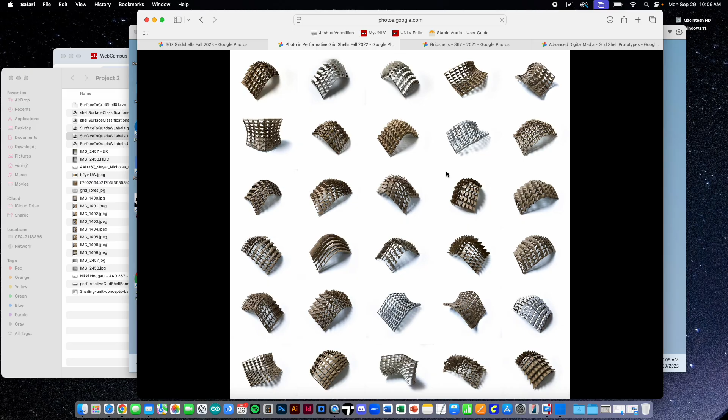I see them sometimes populating in studios, or somebody beams into class on Zoom or something, and I usually see them in the background, pinned up on a bedroom wall or home office wall or something. But again, right, you can see that there's a strange array of these things.

And I just point out that sometimes, for whatever reason, some students will pick to change the material entirely, or just the color of the material between the shape components of the grid system.

So if some of you are thinking, and I'm going to say this more than once over the next couple of weeks, but if some of you are thinking, I have a really complex component that has a lot of folds in it, right, the thicker the material is, the harder it is to make all those folds.

You can go as thin as cardstock. In fact, I've used tissue paper, because the hardest part was just taping it down so it wouldn't move in the bed. You can go with something thin, like...

...let's say cardstock, it's really thin. If you need to go thinner for your shading components in order to make a set of scoring with the laser cutter, you don't cut all the way through. You just cut part of the way through to make a score, just to show you where all those folds are.

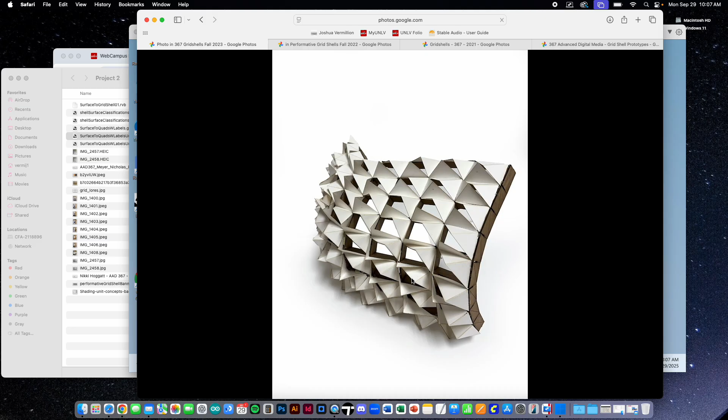So you have some options at your disposal here to play around with. So for example, I think this one had a lot of folds in it, and so I think he went thinner with the shading components.

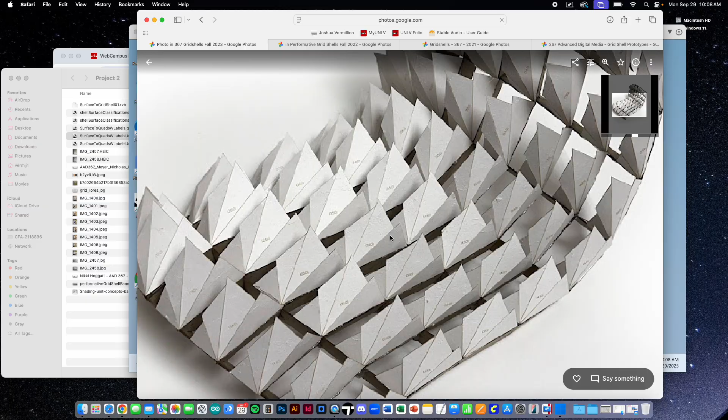Just zooming into this, this isn't my favorite one or anything, but I think you can see several things that are helpful. One is that all of those edges that touch, right, those don't all have to be separate triangles that you have to glue together. But if you can cut the overall shape and then use a laser cutter to just score those fold lines, the break lines, then it gives you a natural way to make it easier to fold it. It also shows you exactly where you're folding it, right?

And then you also see here that each one of these has a very specific place, and he's labeled them as such so that he knows that 24 goes here, 33 goes here, 43 goes there.

We'll talk about that today, and I'll show you how you can generate those labels. Because what you don't want at the end is a really complex jigsaw puzzle. You want everything to be labeled so that you know exactly which component goes into which cell, which notch attaches to the other notch, etc.

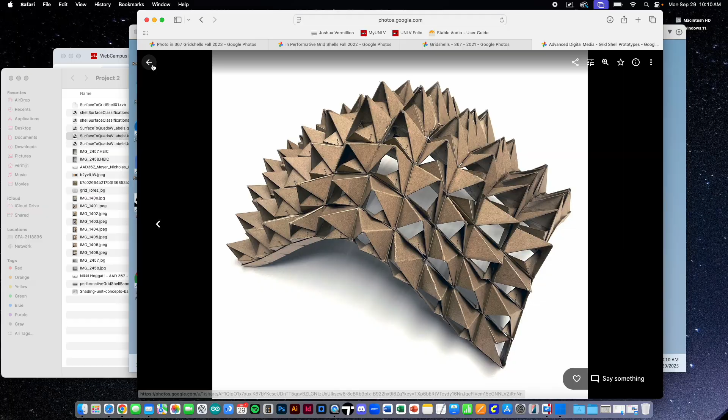I photographed these, and you can see that some of them range from really interesting to really boring, and I won't tell you which ones I think are which. Let me see if I can find anything else here that might be helpful to point out in advance. All right, let's see... no, maybe not.

So the next thing I'm going to do is point you to today's Canvas post and the modules. I've labeled this literally 'putting everything together'—everything you've done so far, getting it ready for laser cutting. You can see there are several steps performed. I've tried to break it down into discrete steps with a logical order so you can hopefully internalize it better, understand it, and then put it to use.

Essentially, what we're going to do is define the actual grid shell geometry that you will then populate with the shading components you've been working on. Not only will we populate that with your shading components, but we'll also populate it with a two-way rib structural system that already has the notches built into it. Then we'll lay all of these things out on the XY plane in top view, flat.

So we're taking three-dimensional components that are modeled in place and laying them all out, labeling them all in an orderly way so that you can then start to situate them within 18 by 32 rectangles corresponding to the size of the laser cutter bed and the size of materials you're going to use.

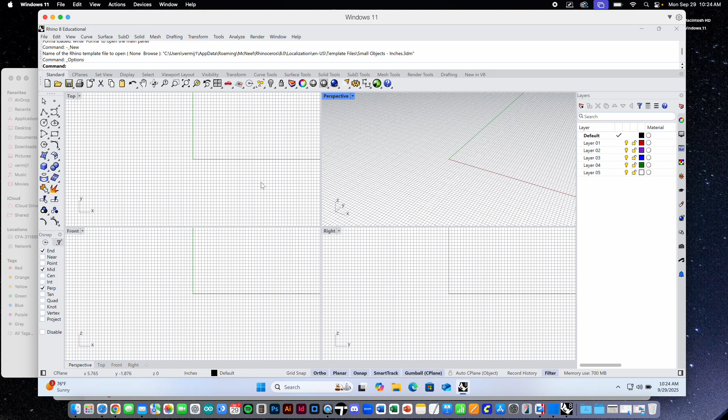We've set the units. I'm going to go ahead and open up that Grasshopper file that I gave you. It's called Shell Surface Classifications Revised 2025.

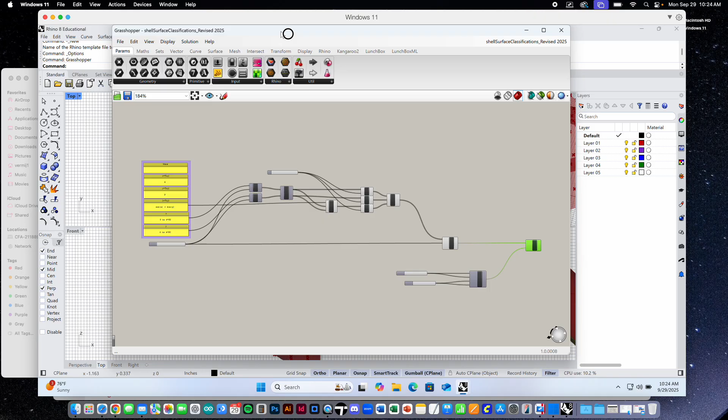I showed this to you the other day, gave you a sneak peek on Wednesday. It's essentially a sine wave swept along with a sine wave. All I'm doing is creating functions, like cosine of x times sine of y for z, plugging in a set of x values that step up, and a set of y values that step up, generating the z values, then plugging them all into x, y, z's for a grid of points, and then surfacing that.

Nothing you really have to worry about. Suffice to say, though, if you remember any of this from Algebra 2, trigonometry, and calculus, maybe even a little physics, you could be your own Antoni Gaudí. Instead of using hanging chain models, you can make digital hanging chain models. A parabola is just y equals x squared, right? Quite easy to do, actually.

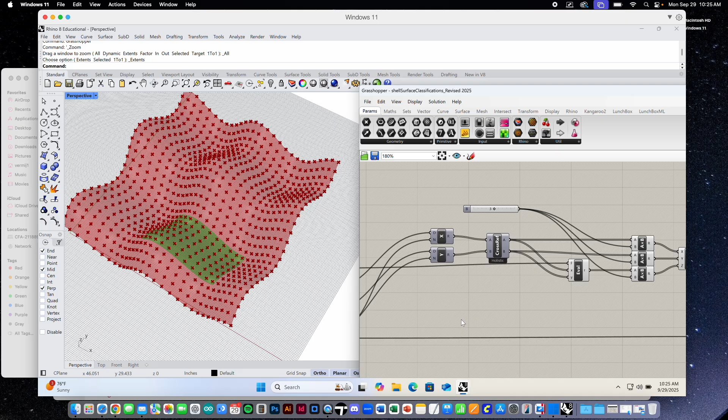Now, what you'll see here is that down here I can change these sliders, and I've highlighted this subsurface. So I have this larger surface, and you can use these sliders to identify which patch, which subsurface, which plot of land you want. As I move this, you can see the size stays the same, this thing isn't going to get a lot bigger or smaller. Everybody's going to have approximately the same scale.

And at that scale, when you break this down into pieces, all the ribs and everything else will still fit on your 18 by 32 max size laser cutting envelope. So that's why I've done this.

Second, if I get really close to the edge, let me select this again, you can see it's just going to slide right off, and you'll get something that's not good. So make sure you maintain that margin so you're getting the full surface patch that you need.

Third, I'm going to try to position this so that I don't have symmetry. When I look at the isoparms in this direction, I have a high point that goes to a low point, and there's an inflection here. It's the same thing in this direction. So now I know exactly what end is which way, because there's a high and a low, and a high and a low. So this isn't bilateral symmetry.

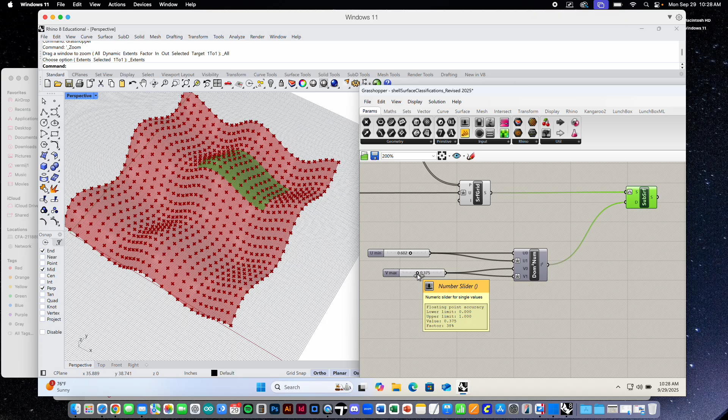Make it easy for myself. Once I have that, I'm almost done with this Grasshopper file. I just need to take this little subsurface that I want to use for my grid shell and bake it into Rhino.

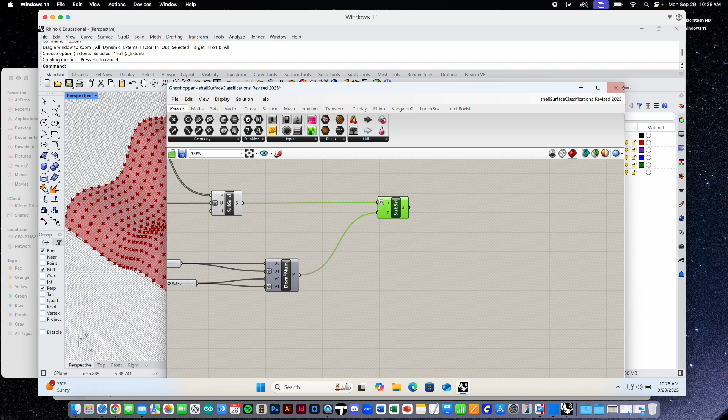I'll just bake it into layer 1, hit OK. I can close this Grasshopper file forever because this is the shape of my grid shell. Everything that I do—shading components, structure, everything—is going to be populated on this. Nothing else.

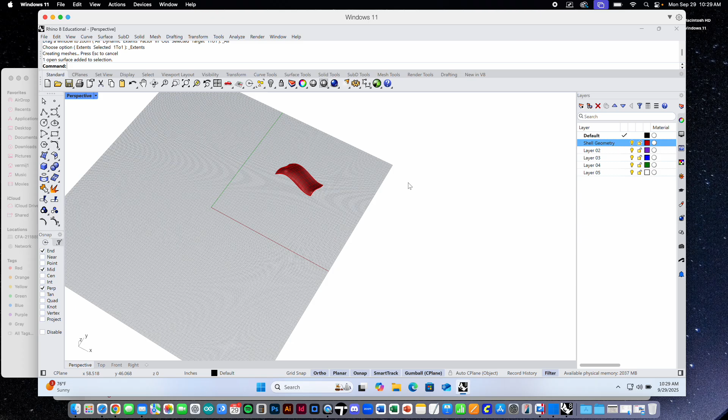One thing to note: I baked it into layer 1. It's baked now. So I'll rename that layer 'shell geometry' and start to utilize my layers to manage things. As I add more and more, I can keep them on different layers, and I can always come back and look at this master geometry. This is the shape—everything needs to sit on this shape.

I'm going to go ahead and move this out of the positive x, positive y quadrant. You'll see why in a little bit—as we start to generate things, the script will place the items it makes out in the positive x, positive y. Then when I unroll things with Grasshopper, they'll also place things in the positive x, positive y. So I want to make sure I'm not overlapping a lot of stuff. I'm just going to pull this off to the side, so it's not in the positive x, positive y quadrant, because everything I generate from here on out is going to sit there automatically, and then I'll have to move things away and put them on the right layers.

All right, you guys ready to see the next step? Which is using this grid shell shaped surface to generate the grid shell structure, using the given Rhino scripts. Sorry, I forgot to upload it—I'll upload it right at the end of class. Shout out to my pal Andrew, who wrote this back in the early aughts when he was doing his master's at the Architectural Association. You'll generate a two-way rib structure, basically the grid shell structure, and it'll ask you for some very specific parameters.

You guys want to see how to do this? This is great, because if you figure out how to write script—first of all, we're figuring out how to do that in Grasshopper without actually writing the script—but you can see that if you're quite adept at Python or C# or something, you can actually write your own stuff and automate things. So this is where you go, 'I'd love to play around with this, but I'd rather just sip my coffee and watch my computer do it for me.' And you'll watch and see what that means.

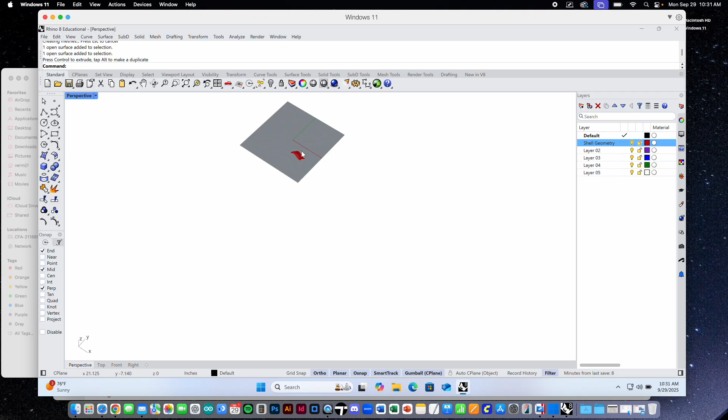In order to run a Rhino script on the Windows side, again I go to Tools, pull down, and I go to Rhino Script, and then Edit. That'll bring up a plugin called the Rhino Script Editor. So: Tools, pull down, Rhino Script, then Edit. It might take a minute. There it goes—there's my Rhino Script Editor. Now I have a file already loaded called 'surface to grid shell 01.rvb'.

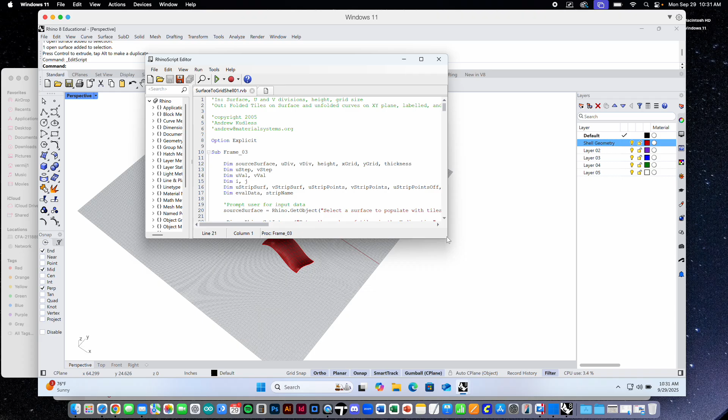I'm going to share that with you as soon as I can, but just watch what this does. Sorry, I'm just trying to resize this window. There we go, so we can see it a little better. Let's take a quick look at what's actually happening under the hood here.

If you really wanted to write code yourself and get under the hood, you can do that. I liken this to when I take my car in—I know how to change my oil, but my driveway isn't flat, so most of the time I just take it into the dealership, keep the warranty going, because it's like a 100,000-mile warranty, so let them do it. It's like $50, and it's less money I have to pay for my backaches later on trying to go underneath my car changing my own oil. You can do this, or you can just use these tools over here—sort of like those two things. But honestly, your software is a bunch of code, a bunch of functions, and every time I hit a button over here, it calls up a function that looks similar to this.

Just because we don't see it doesn't mean it's not there. You can expose that stuff and take a look at it, and even write your own. So there's no button on the left-hand side that takes a surface and breaks it up into a set of ribs in two different directions, using divisions at once.

So we can write a script that does that. You can see up at the top where you have that apostrophe at the very beginning, it's greened out - those are just comments. Those are things the computer doesn't read, but anybody looking at the script can read, dealing with authorship, copyright, date, version, or giving it labels along the way. Commenting throughout so people can read in natural language what each part does.

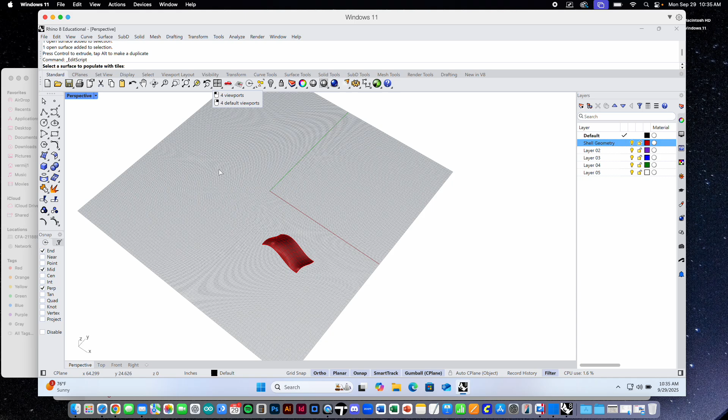So I'll say, okay, let's populate this surface. Now enter the number of tiles in the U direction - I think I've been using 10 and 10, so I'll type in 10, and then for the V direction also 10. Now enter the height or depth of each strip - this is the structural depth. I'll go ahead and say 0.75, three quarters of an inch, because we're using inches as our units. If we say 0.75, that'll be 3/4 of an inch.

Enter the X distance between unrolled strips. What it's going to do is populate this with a set of ribs in the U direction and the V direction, and also take each of those and lay them out flat on the XY plane. When it's laying these things out, it wants to know how much space to put between the first U rib and the second, and the third. It also wants to understand, once it runs through the U's, the spacing in this direction to start the V's. So I'm going to give it something that's probably too big, just to make sure none of these things are overlapping, because that becomes a big pain. So I'm going to say 20, and I'll say 40 - why not?

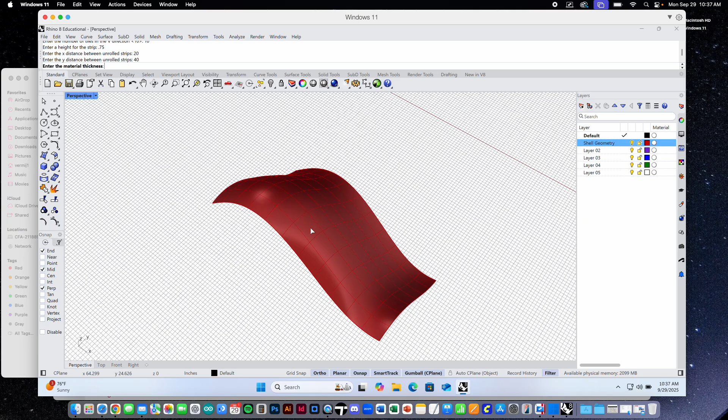Now the material thickness, that's critical, because it's going to generate notches, and those notches are where this rib joins into this rib. So that material thickness is critical. I'm just going to go with the standard 0.020, but that's something you want to be very mindful of when buying the material and look at it. If you have questions about how thick something is, take it to Kyle and the folks in the laser cutter room and ask if they have digital calipers. You can mic it with a micrometer and find out a fairly accurate thickness. So I'll say 0.020, and now I just watch it do my work for me.

When it's done, the editor box comes up, and you can see it's populated this with a two-way rib system.

Now let's notice that when I select each rib and go to the properties, it's labeled. So that's V rib number 8, that's V rib number 9, that's V rib number 10, 7, 6, 5, 4, 3, 2, 1, 0. Makes sense, right? For 10 cells, we're going to have 11 ribs, and they start counting at 0, so V0 all the way to V10.

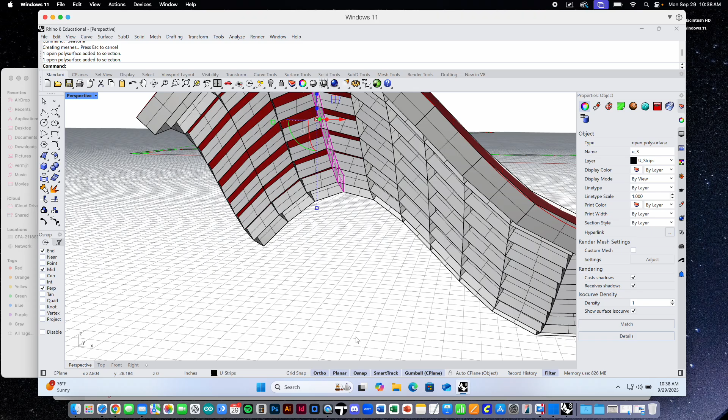And if I do the same thing in the other direction, that's U3. So that's U0, 1, 2, 3, 4, 5, 6, 7, 8, 9, 10. So it's labeling these things for us, and when I go to the top view, you can see it put it in this top quadrant that I just moved my surface away from. This is why I moved that surface away, so I wouldn't have this thing just sort of sitting out here, ribs.

Let's zoom in on these, but you can see it's unrolled each of these ribs and laid them out flat. I'm just going to turn off... I'm just going to go to Tools and turn off this grid so you can see maybe a little better on the projection here. There we are.

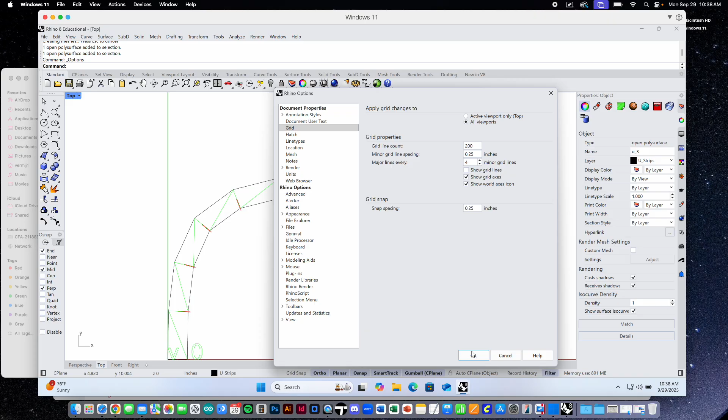Okay, so you can see we have a set of black lines or curves. That's the through cut, the overall outline. For the notches, it just made a little box, right? It didn't actually trim everything out because at that point it's kind of like, why bother. Then it also gives you these score lines. So if this thing is really bendy and has to bend into place as you're fitting all these things together, if you have a thicker material, that can actually help with it being a little more pliable without snapping or ripping.

And then we have a label. Now these labels, some of them are curves and some are text objects. I'm going to advise you to pay attention to the font being used, the size, and the placement of these, and just simply add your own labels. Here's why: if I think about this 0, and I'm just going to score this, the laser cutter has to go around once and then a second time. For a V, it has to go this way and then this way again. We have a lot of redundant lines. If it's 1 or 2, it doesn't really matter so much, it goes by quick. But when you multiply that over all of the labels you're going to have, you double the amount of time it's going to take, which is double the amount of money you have to pay for time. So what I'm saying is that there are single stroke fonts. A V is just simple 2 lines. A 0 is just one sort of arc or whatever. So that you can begin to really optimize these things.

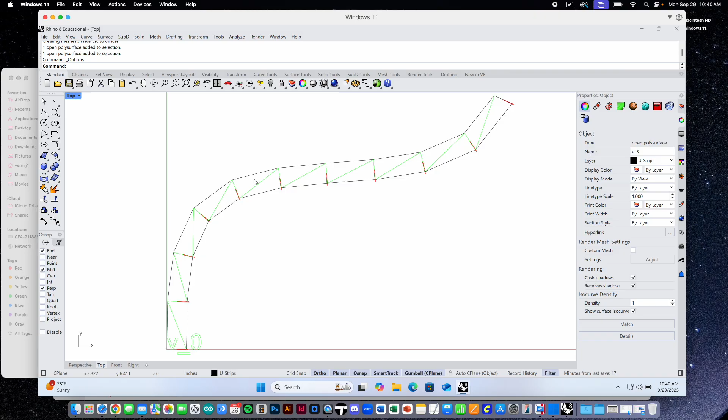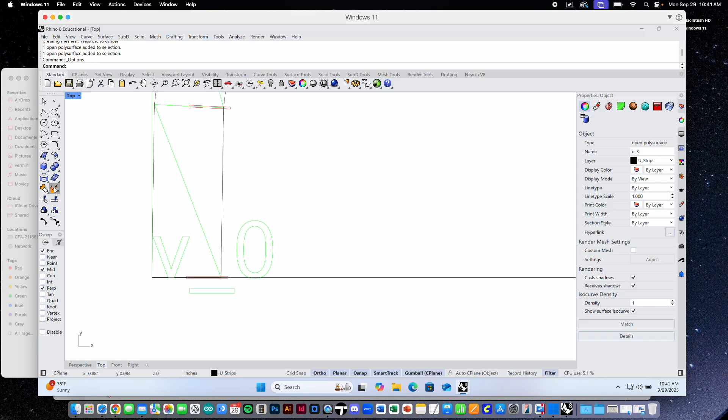So let me just point this out. But if I wanted to relabel these, for instance, let me zoom way in. I'm going to go to the text tool. Where is that at here? Let's see, why is my OSNAP over here? They're always moving things, why? It's not an improvement. Where's text? Usually has like a T. Am I just stupid, where is it? Maybe I just type in text. Oh, here we go, I'll just type in text as the command line.

Here I can give it a very specific way to format it, if I have decimal places, which I don't. I can give it a height or scale. I can tell it the exact font that I want.

And here's the font that I would recommend using. I believe it's called Rhino Single Stroke Architect or something. Let's go find it. If I can't find it today, Kyle will be able to point it out to you guys on Wednesday, and I'll post the official name again. There are so many fonts, and most of them are pretty pedestrian and terrible. Could we just pare this down to the useful ones here? Let's see, maybe it starts with an S. Self, or single font, single stroke. Here we go. It's called SLF Rhino Architect, RHN. So single line font, Rhino Architect. I don't know why they hide it like that.

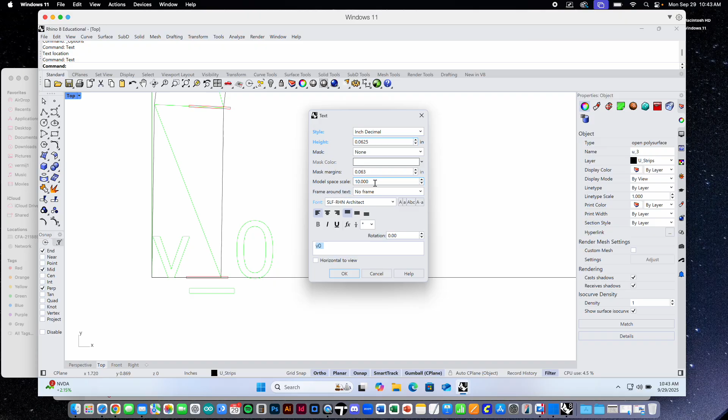Okay, so if I simply say the height is going to be 1/8 of an inch, let's try that, why not? What text do I want to do? V0. Okay, maybe that's too big. The height is, I don't know why it's saying 16th maybe. I don't know why this is 0.0625, let's do that. Model space scale, I don't know why this is set to 10, maybe that's why. Okay, there we go, now it's at 16th, right? I can simply place that very carefully and get rid of this other garbage, which wasn't joined even. The script still works, but it's a little buggy now after moving on from Rhino 3 to Rhino 4, 5, 6, 7, now 8, and soon 9.

So now I can make my own, and move it into a non-conspicuous place. What I recommend doing, you're going to see some of these marks, like on some of the examples I showed in the photos. Just make them perfectly imperfect then, right? Put them in the exact same spot for each rib so it sort of serially reads as, you know, these marks are there for a reason. They're not haphazardly placed, not accidental, right? So in this case I might just try to place it as close to the corner as I can and then move on to the next one. That's one thing I'm going to advise you to do. It might take you an extra 5 minutes in Rhino, but it might save you an extra $8 and an extra hour of laser cutting. So when I look at the trade-offs for these notches and trying to trim those out, not worth it. The trade-off for redoing those labels, worth it, right? Especially since how big those things were, they sort of fell off the page and they look goofy anyway.

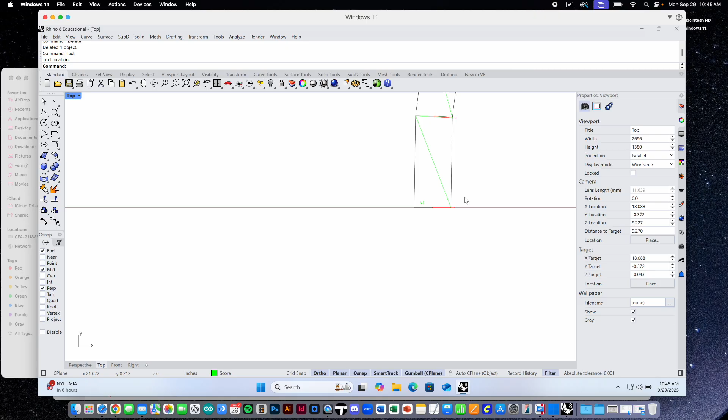You have to move the text to a certain layer? Yeah, that's a good question. Right now they're on the green layer, which at this point is the scoring layer. So you can see that when it did this, it put the V strips on a layer, the U strips on a layer, and all the stuff to cut. The notches are on this red layer, and all the scoring is on this green layer. So I'm just keeping it real by keeping it on the green layer with its properties. You see how the green layer is check marked? It's a very good point, right? As I do this stuff, rearranging, moving, ordering, adding, subtracting things, I want to make sure I'm doing them on the right layers. So very good point, thanks for bringing that up.

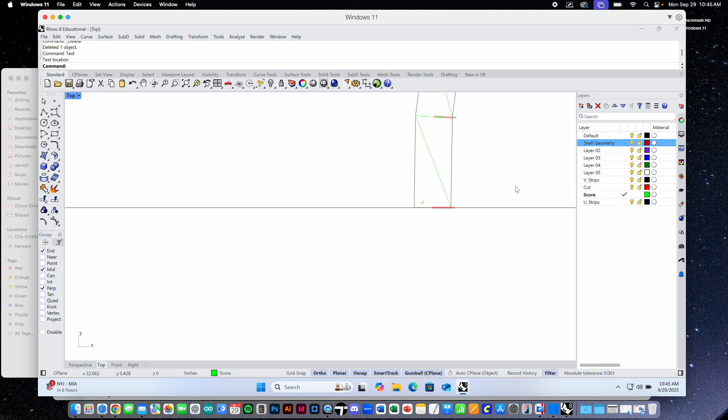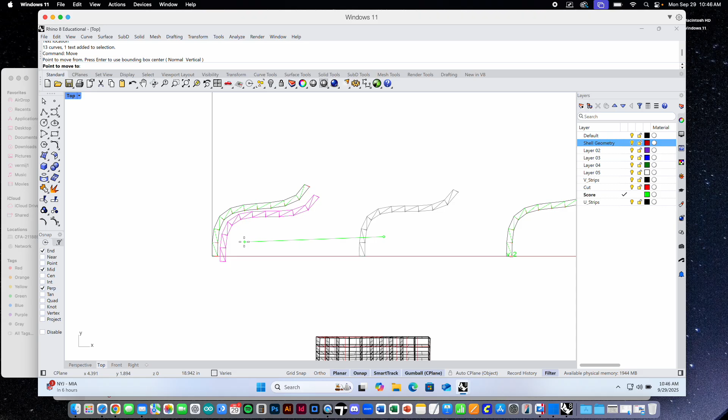I'm not going to bore you guys to death by doing this 20 times, but you get the idea. Within 5 minutes I could get this thing done. The other thing to keep in mind is that if I wanted to make this much more efficient, I type in move, let me turn off the ortho, and I could start to nest these things much closer to each other. As long as they don't overlap, I can begin to better utilize my materials and try to minimize the amount of waste I have.

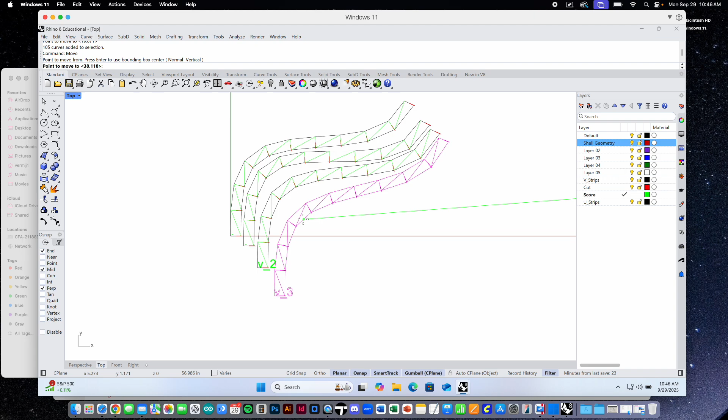So I could start to serially sort of move these things, trying again to minimize the amount of waste I have. Now that's step 2, right? So I'm going to keep these, and I'm just going to move them off now, because the next set of stuff I generate is going to be generated again in this positive X, positive Y quadrant.

Let's take a look at what that involves. Step 2, we just finished. Step 3: use your Grasshopper GH file from this weekend to populate your new grid shell surface with your shading component system. Some of you are primed right now to do that. A few of you are still working out some of the kinks. That's fine.

You'll see that over the next 2 weeks or so, the key thing is to probably be prepared by Wednesday, or by the end of the week, to sign up for laser cutting time. Then you have an appointment. Then it's a matter of reverse engineering from that appointment to make sure you hit your deadlines. Some of you might be starting from a little further back, and some a little closer to the end.

So that happens, right? Keep in mind this is prototype number 1. It's a first draft, so I'm not expecting perfection. In fact, some of you will fail miserably. As long as you bring in the pieces and show me how you failed, you'll get full credit. And we can have a really fruitful discussion on why things went wrong and how to fix them. That's how we learn.

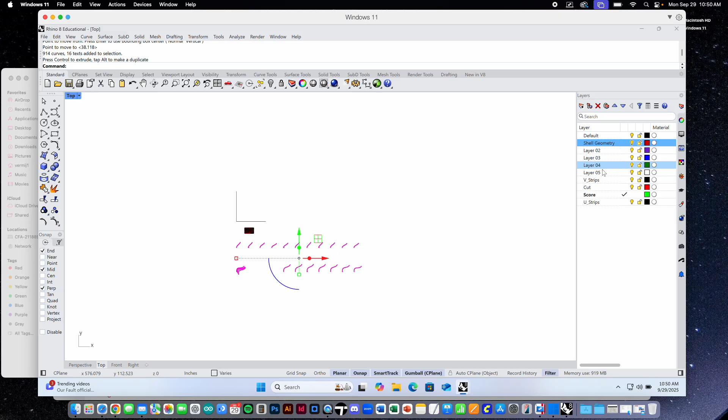All right, so anyway, let's talk about that. So again, I have my default layer. I have these other defaults: layer 2, layer 3, layer 4, layer 5. I have what used to be layer 1—I've named it shell geometry. That's where my surface is.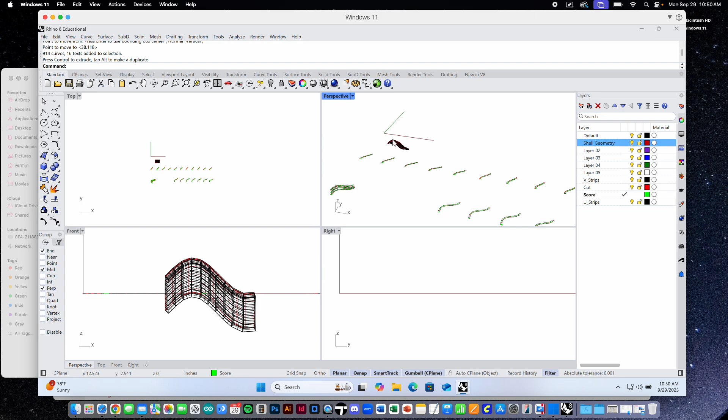And then I also have V-strips, U-strips, cut and score, which are all the layers that Rhino script generated for me, putting all the different pieces of geometry in the right layers for me. So you can see that underneath this surface I have my structure—a 10 by 10 grid of cells.

Now it's time to do the same thing we've been doing, but now with this surface. We'll open up our parametric shading component, plug this surface in on the very left until it's divided 10 by 10, since I did that with the Rhino script, so everything will line up. It'll be fantastic. Then we'll talk about how to bring those shading components and flatten them out.

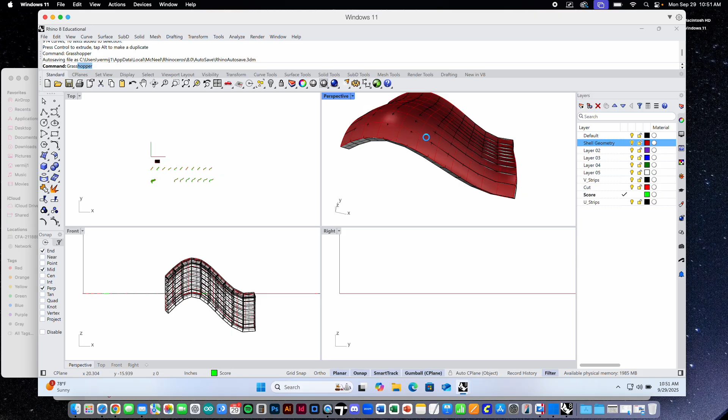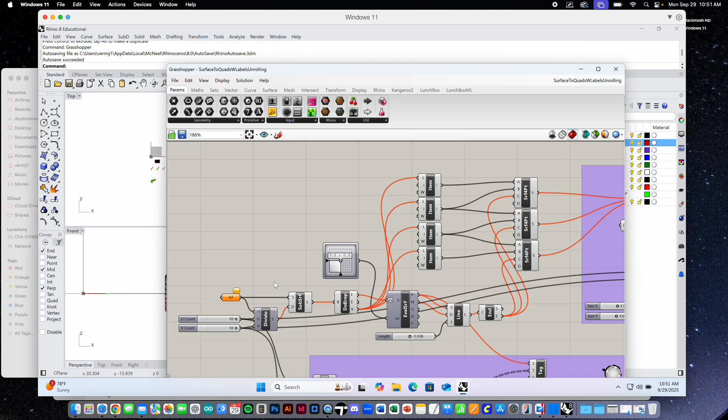When last we talked, I had one of the example files. Let's open it up, this one from this morning. You can see this thing, not unlike what you guys were up to, takes a surface on the very left, divides it 10 by 10, creates a set of checkers, quads, dividing it up into a chessboard of columns and rows. Then I break it up into its faces, constituent edges, and vertices, and start to connect the dots with surfaces to create a three-sided pyramid. Really boring, honestly—you guys have better stuff.

In order to do that, I take some of these faces and place a point there so I can get both a location for an apex for the top of the pyramid, but also that normal direction, so that as the surface curves, the normal direction changes with it, cell to cell. Let's take a look and see what that does.

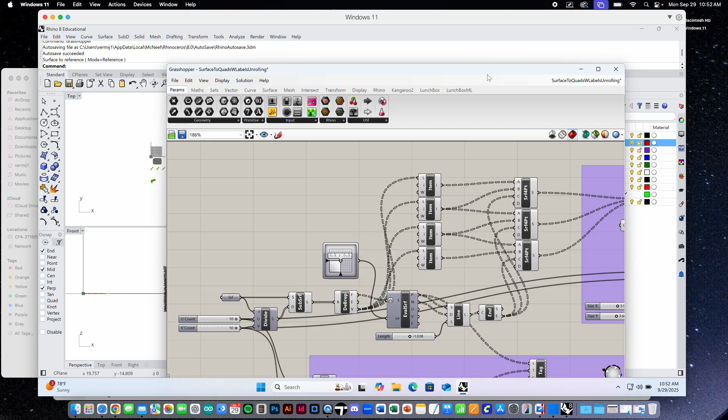Let's set one surface, and now I can give it this red surface that I made. Ah, look at that. Now let me just select the right things here, there, here, and here. There we are. Now it's populated. Let me turn off that red surface in Rhino and look at it—yeah, those things line up with the grid exactly.

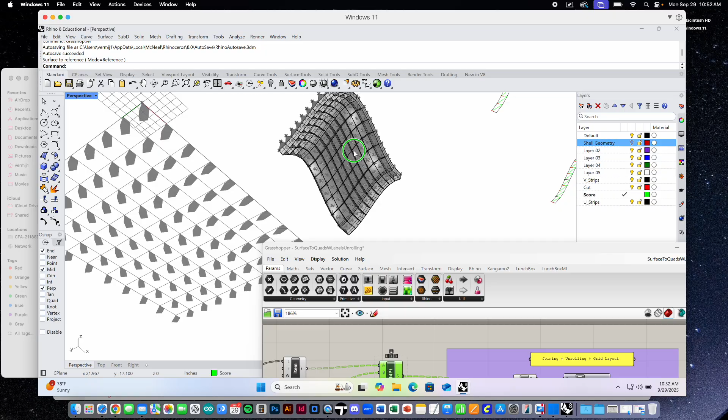Like the ribs and everything—there's the same Rhino methods of dividing the surface in the Rhino script as there is in Grasshopper. We're just using, well, it's the same geometry, let's just say that. So everything just works, which is kind of nice, actually, for once.

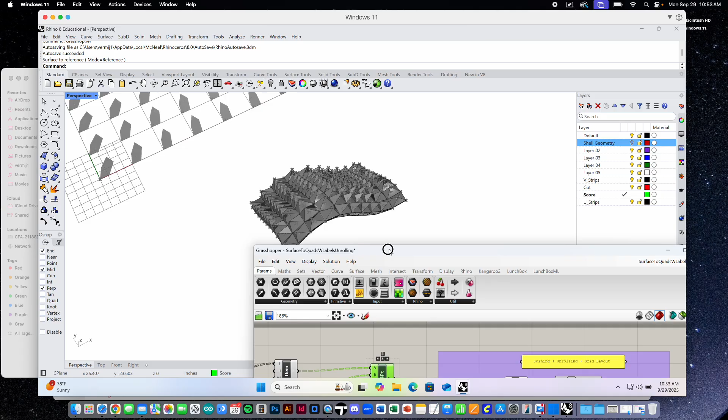Yikes. All right, so now what else is it doing? Let's see here. It is adding a label to each cell so that I know that 0,0 is this way on this corner, and 0,1, 0,2, all the way to 0,9, 10 to 19, 20, 29.

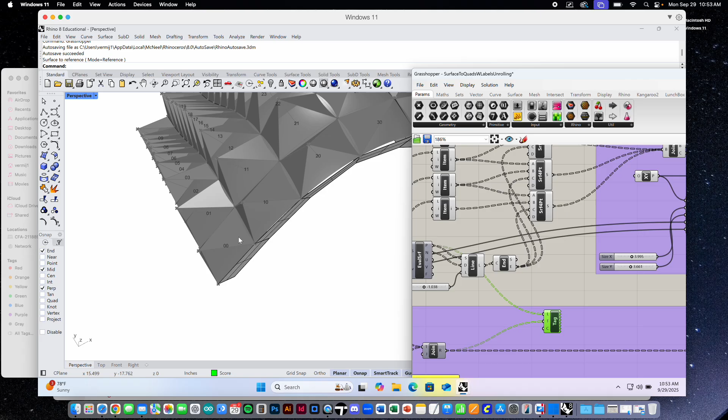And it's taking each of these shading components and unrolling them out here, labeling them as well with the exact same numbering, 0,0, 0,1, all the way to 9,9. Now you'll see that this text widget's a little funky—it's just going to give you text, it doesn't really have any curves or anything to it.

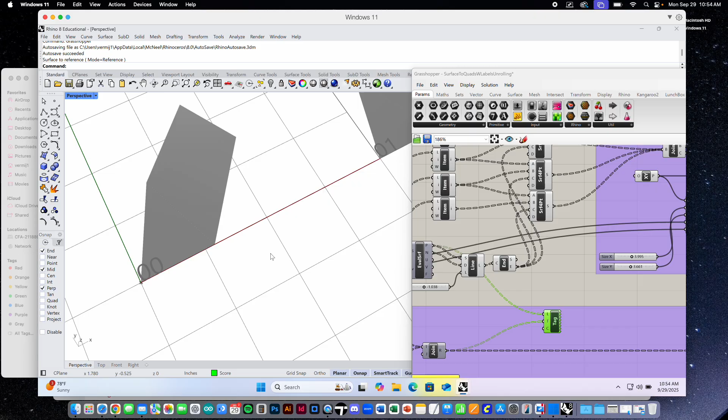So I'll show you that when we bake that in, you can change all of those at once if you bake them all into their own layer. Then you can select them all at once and change all their properties, like the font size and the font and everything else. So mostly it all just works, but there are still a few trivial details you have to manage. But the hard parts, all the really time-consuming stuff, are largely automated.

So let's take a look at what's happening here in Grasshopper first, and then I'll show you what happens when we bake this into Rhino. All the stuff that's not in the shaded violet areas, you've seen before: we take a surface, call it a two-dimensional domain, and divide each of those two-dimensional domains 10 times by 10 times.

We plug those into the ISO trim widget to get a series of batches across, to generate the actual subsurfaces. We explode them, get their faces, edges, and vertices, and then play games with the data trees and lists, connecting dots with surfaces, etc. So you've been here before.

The new stuff is here in this violet box, and here in this violet box. What does this violet box do? I made a little notation for you guys—this is all about making labels. And then up here, this is all about joining those components together, so if you have any surfaces with common edges, they'll be joined together as a polysurface.

Right, that's what that join does. Then we use the unroll, and we say don't explode, and it lays them all out flat. Then we move them into a grid. Now we can adjust the spacing so that instead of stacking them all up overlapping, it'll space them out, and we can move those sliders to tighten them up just right so we can minimize the amount of waste materials.

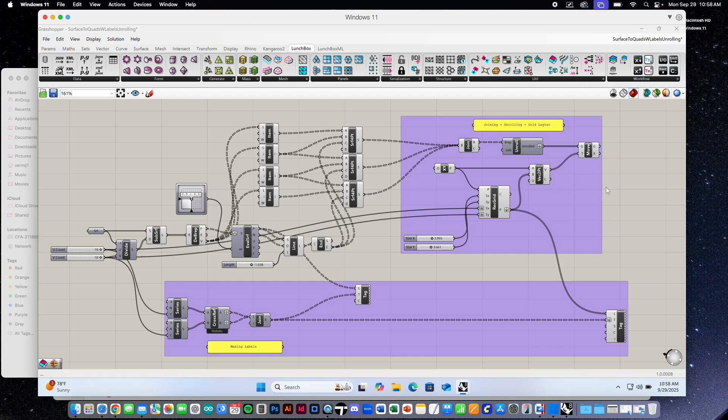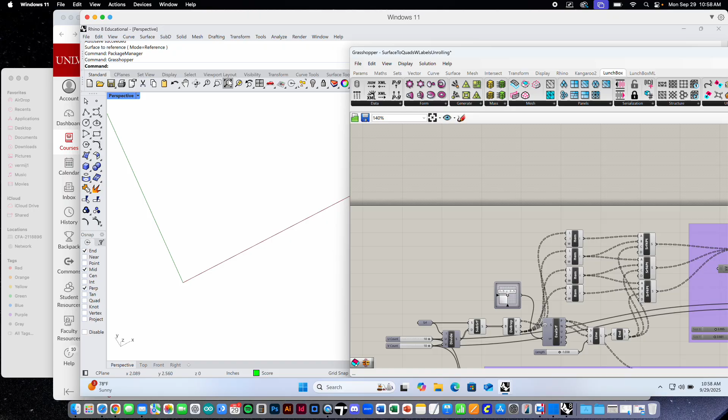Okay, so let me just select all of these things. And solution, let's turn these off, let's disable them. All right, and I'm just going to start from generating my pyramids, and let's just look and see what I have, right?

So you can see in my case, I just have a three-sided pyramid. It looks like a cheese grater that got bent up in the dishwasher or something. It's creepy looking, but whatever, maybe I like spikes and armadillos or something, I don't know. But what you can see is that I have three triangular surfaces, right? In fact, not a big surprise. One surface, two surfaces, three surfaces, right?

Now they're individual surfaces. So one of the things I'm going to do is say, well, look at this, I could do 3 triangles and triple the amount of joints I have to glue, and triple the amount of effort I have to put into trying to get everything to line up nicely and look good. Or I could say, really, this is one shape, right? It's basically a shape where I can score the folds and then fold it into what looks like three triangles. Yeah, hopefully that's intuitive.

So what I'm going to do is join them into a polysurface. So if I go to Surface Tools and go to Utilities, I have something called BREP join. Again, BREP is just boundary representation, a fancy name for—if you think of a Venn diagram—the larger polysurface, and inside of that the circle of all surfaces. BREP is just an abstract concept, but it's the label we give for surfaces and polysurfaces in particular.

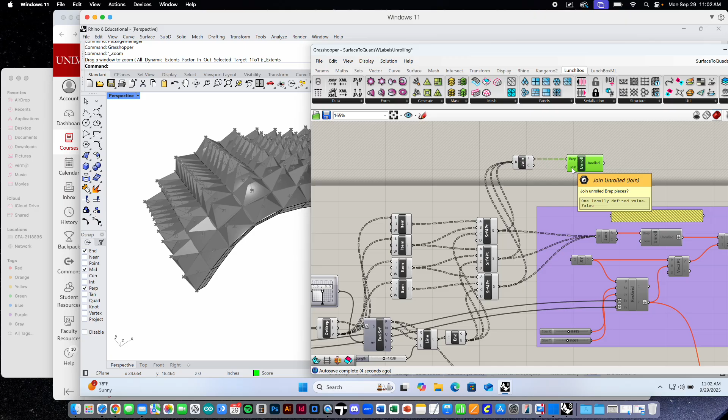I'm going to go ahead and plug them in. Here are the BREPs, I'll plug them into this. It's asking for a BREP to unroll. And now down here it says join—do you want to keep them joined together if there are any polysurfaces? Do you want to keep them stitched up, or do you want to explode them out? So I'm going to say, do I want them to remain joined? I'm going to go ahead and toggle that to true.

Really important. Now it's going to take all 100 of these, and it's going to unroll them and pile them up at the 0,0,0 point. So it's not very useful to see 100 of them all overlap like this, like a big sandwich, right? That's why the next step, I make a grid, and then I move these along the grid. And then I can change that grid so I lay them all out flat, but none of them are overlapping. That's really important in this grid, no overlaps, right?

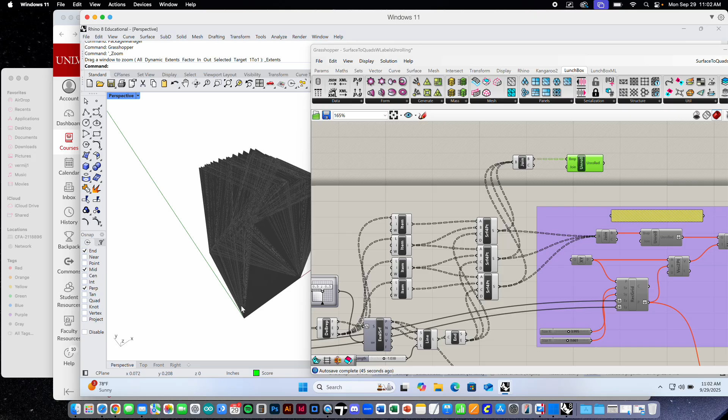Okay, now we've been here before, right? We've made a grid of points, right? Oh yeah, that was like week 1, right? We made a list of numbers that climb from 0 to whatever, and then we plugged them in as X and Y values and we get grid points, right? We use the cross-reference.

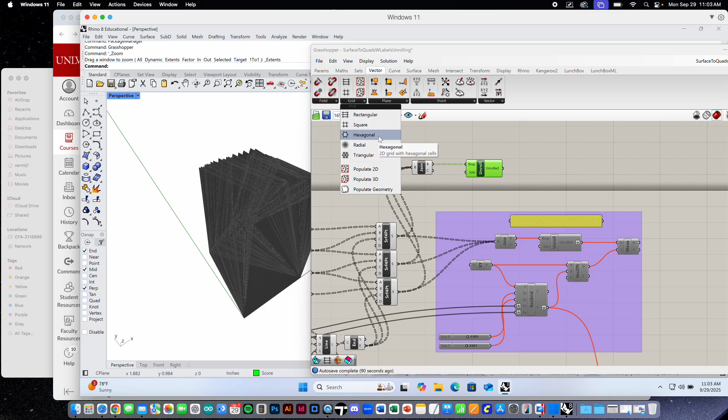All right, let's do it the easier way. There's a widget that does it for us. We go to the Vector tab. We can make different types of grids here—similar parameters, but fewer widgets, right? So we can make a rectangular or a square. Let's do a rectangular. That assumes we can give different spacing in this direction versus this direction, right? So doing this, maybe tighten things up and try to minimize the weird offcuts that we get and the amount of material we end up throwing away or recycling.

All right, so let's do a rectangular grid. Now it's going to ask us several things. First, the point to start with, and I'll just use the world X, Y. That's fine, I don't care, right? But then it's going to say the size of the grid cells, right? So that's going to be a variable, like I said, a number slider. And then it also says the number of grid cells in the X and the Y, right?

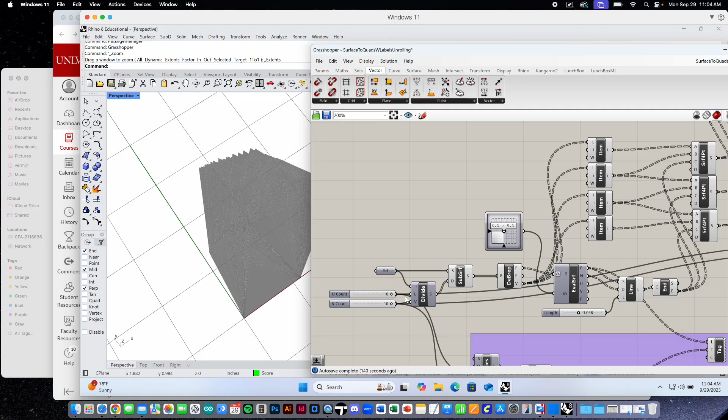Yeah, that's very important. So what we're going to do is go all the way back here and say, well, what governs the number of grid cells we need are these sliders right back here. If I change those, the number of cells I have on that surface are going to change, and therefore the number of components I'm going to have changes, and therefore the number of points in my grid to lay out those components will change, right? So if you think about this, we have 10 by 10, so we have 100. It's asking us how many grid cells are we going to create, right? So if we just plug in the 10 by 10 here, let's take a look and see what it does to us. We'll try it. Here we go.

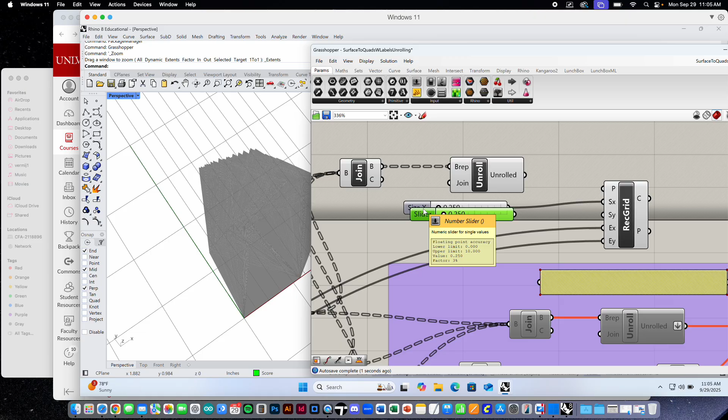Come on now. There we go. There's the points, and now we'll generate these. Let's make a slider that goes from 0 to 10 or something, probably way too large, but we'll do it anyway. Make a copy of that, plug it in for the Y spacing, and we'll take a look at this grid.

Now, what we're going to need are the points, right? Because we're going to move everything away. We're going to do a translate command. We'll take the first one and move it from the 0,0,0 point to the first point in the grid, and then the second one, from 0,0,0 to the second point in the grid. We'll just do a series of translations or moves based off of those points.

And when we do 10 cells, we get 11 points, right? So what we need to do is take whatever those sliders at the very beginning are and subtract 1 from each, and then plug that in for the number of cells so that we get the right number of points.

Does that make sense? If I do 10 cells, I get 11 points to define those 10 cells. I have 11 lines, grid lines, in either direction. And so I want the points—that's what's really handy to me. So I need 10 by 10 points. You can see right now with 10 cells, we get 11 by 11 points. 121 is the square of 11, right?

Okay, so we can do this several ways. We have math—we can just do subtract and say plug this value in and subtract 1 from it. But let's just do it maybe a quicker way. We'll right-click on where we're plugging these in to the input, and down here, this is where we typically find things like flatten. If we have a data tree, we need to flatten into a list, or we reparameterize a curve if we want it to go from 0 to 1.

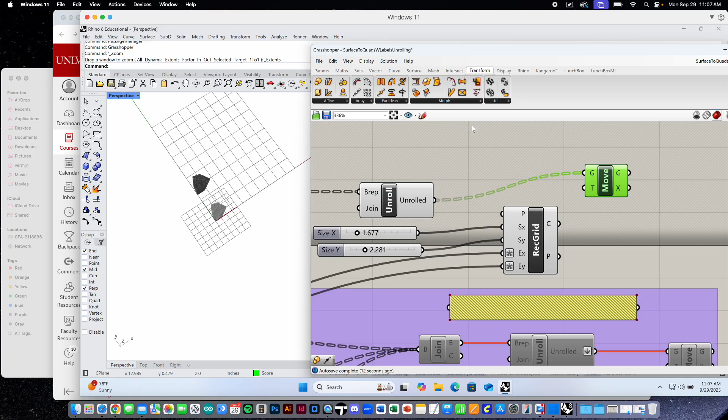Alright, last but not least, let's move these things around. So what I'm going to do is transform and move. What am I going to move? Each of these. Or where am I going to move them? I need to give it a list of 100 translation vectors, right? From here to there, from here to there, from here to there. So take the first one and move it a little bit, the second one move it more, the third one move it more. So it wants a translation vector.

And so what we'll do, that's easy enough—we'll go to vectors, and let's make a vector between two points. We'll use this point, this plane, wherever that's located, and then we'll feed it also these points, and then we'll get a series of translation vectors. I can tell you guys are so excited.

Maybe we'll just leave it as is. Maybe I'll flatten these, because what I'll be doing is giving it a list, so I want to give it a list up here. We can see that it's dashed—we have a data tree. I usually don't want to match lists with data trees; I want to match lists with lists, or data trees with data trees. So I'm going to flatten that data tree, because I'm going to be plugging in a list. So here we go, here's those.

And let's see what we got here. I'll go ahead and flatten these as well. Yeah, okay, maybe. Yeah, there we go. And let's actually pick the point that we want now, right? I mean, doesn't that sound good? Okay, so I'm just going to go to vector and say, let's make an XY plane.

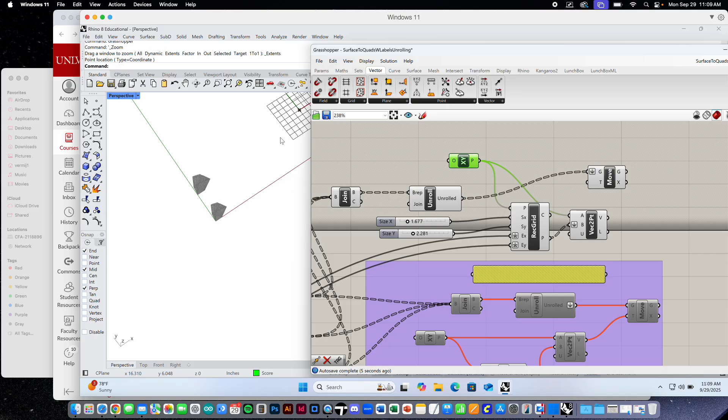And where do we want to make that XY plane? Well, we'll get to there. By default, I think it's going to be at 0,0,0. But if I right-click on this and say set one point, I can set it anywhere—I can click on my screen and set it anywhere. And so now these translation vectors, now we have these things set up in the grid. Let's go ahead and take this old version, turn off the preview, and now we can adjust this grid until we have no overlaps.

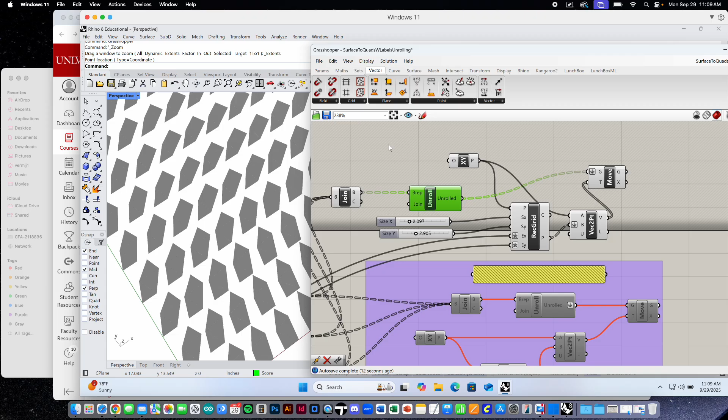Let's just turn all this stuff back on. I don't know what the sound effect for that would be. And trust me, I'm not going to do it in front of you guys. There we go. All right.

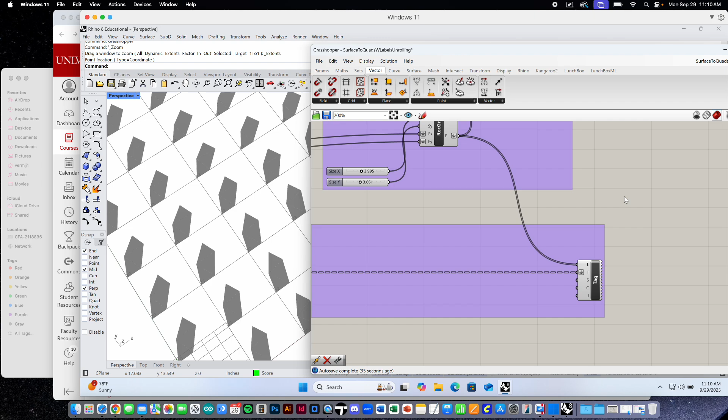Now notice this grid of points we made, I'm also using it down here to show where I want all the labels, right? Yeah, all right. So how am I doing the labels?

Let's take a look real quick. Again, I come back to the very far left. How many labels do I need? Well, according to my number sliders here, 10 by 10, but I can always change them. So I'm going to link up the number that I need to the number sliders in case I would adjust that. So if I adjust the number sliders, nothing will break. Everything will adjust with it from left to right.

Okay, so what am I doing in the series? You guys tell me this. Someone, what's the series do? Series widget, what does it create? A list of numbers, yeah, that are ordered in a certain way, right? The start point, start number, the increment number, and the amount of increments, right?

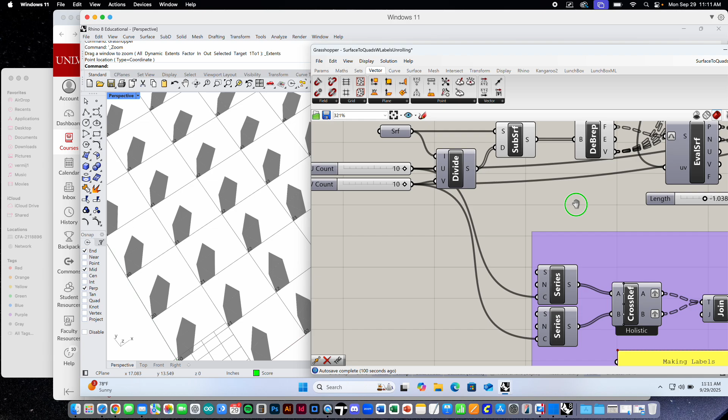So we start with 0. We say we need 100 of these, and it's an increment of 1 each time, right? So we go 0 to 99. Let's test my thesis here. Yeah, 0 to 9, there we go. What did I say, 99? 0 to 9, yes, because we need 10 each, right? 0 to 9. And then I just cross-reference those, right?

So then I get a bunch of numbers that I can plug in and join together. Now this is called a text join, right? So what I'm doing is I'm generating a set of numbers, 00 all the way to 99, and everything in between: 00, 01, 02, 03, 04, all the way to 99. Basically, I'm doing 9 zeros, 9 ones, 9 twos, 9 threes, and then this one I go 0 to 9, 9 times, 10 times: 0-9, 0-9, 0-9. I link those up and I get 00, 01, 02, 03, all the way to 99 by using the text join tool. I know it's a little weird, but that's how I do it.

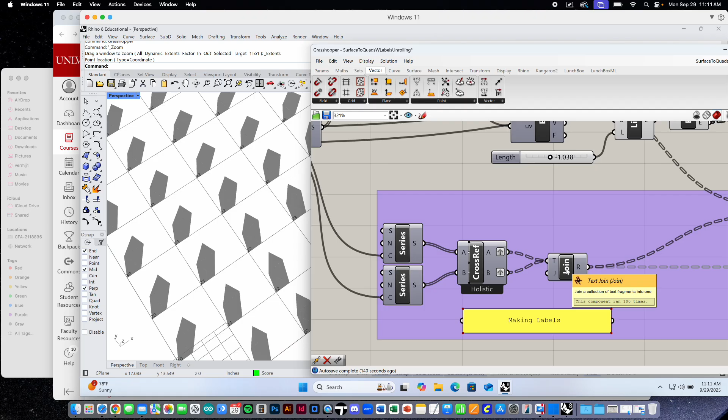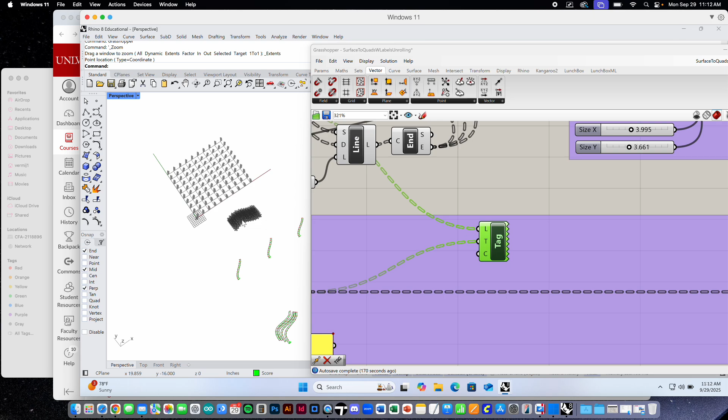And then I simply plug that in for the text, and then this text tag widget asks where I want the text and what text to display, right? And then there's something else, optional color. All right, whatever. So that's where I'm generating the text over here, showing each cell. And then I also am doing it over here, showing the corresponding component that sits in that cell.

Now, let's talk about the sort of weird idiosyncrasies when I bake this into Rhino and some of the things I can do with the text. Okay, we're almost there, 3 more minutes, I promise. And we'll get through this all, and it'll be packaged up in Canvas so you can refer to it.